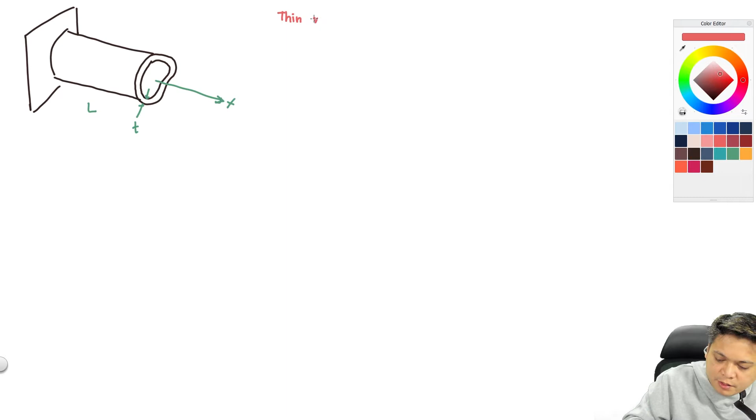Ngayon, ang mahalaga sa torsion for thin-walled, ang tawag natin dito is torsion for thin-walled vessel. Yung thickness niya sobrang manipis. Ngayon, yung thickness niya, it runs through dun sa pinaka-median, parang gitnang-gitna ng thickness. So may mapoform ka doon, isang closed loop.

At saka try natin paikutin by a torsion T. Ngayon, yung effect ng torsion na yon dun sa body, mula dito sa free end hanggang dun sa pinakadulo, nagbabago-bago. Kuha ko ng isa lang dito, maliit na block. Tapos i-draw ko siya dito, medyo papalakihin ko ng konti.

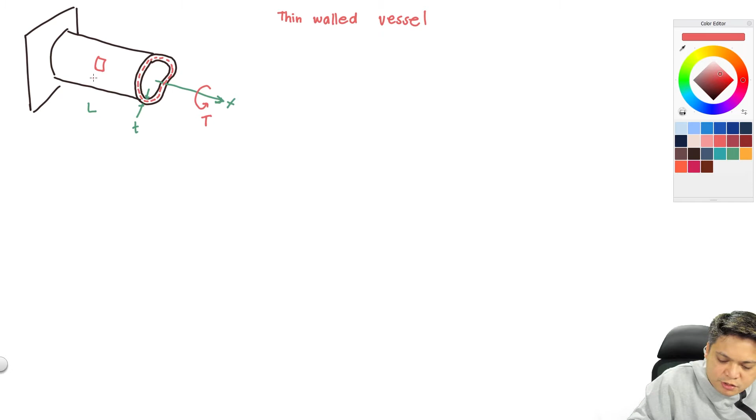So kapag dinrawing ko siya, para siyang medyo naka-curve na ganyan. Ayan, medyo curve na ganun. And then syempre meron yung thickness. Kumbaga nag-cut ako dun sa part na yan. So since dun sa kinat ko, 4 na edges yung nakatanaw.

So dito mayroon ako ditong shear force or shear stress. Dito meron din, hypothetical direction, meron ka din itong shear. Ngayon dun din sa magkabila, meron ka rin dong shear. So may shear ka rin na paganto, and may shear ka rin na paganan. Dapat baliktaran. If this is towards to the right, yung isa is towards to the left sa likod, para mag-equal sila, for equilibrium dapat equal sila.

Okay, itong dimension ko naito, this is parallel to the x. Kaya lang ang kinuha lang natin ay sobrang liit, infinitesimal length. So since that is the axis of x, I will call it as my dx. And itong pa-curve naito around the perimeter, kung titignan nyo ito lang yung part na yan. Kung ipo-project natin doon, ito lang yung part na yan. Tawagin natin siya, yung buong perimeter is S, so we will call it as ds.

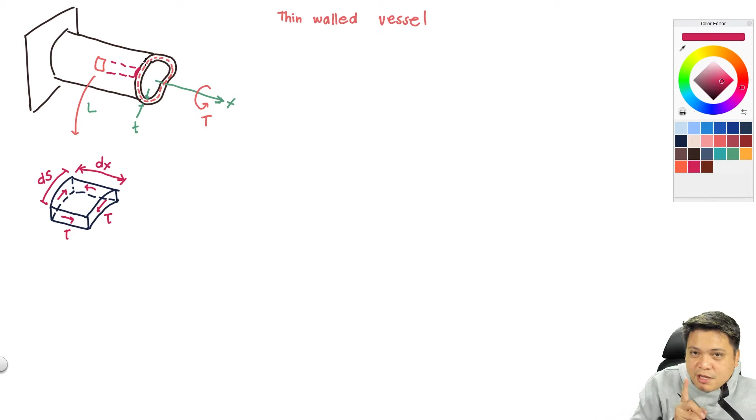So dalawang direction, you have the X, and then you have the S. Ngayon yung shear stress natin, since this time i-introduce ko na yung concept ng tinatawag nating shear flow. So you have there the shear flow. It runs through the midway or sa median line natin, I will call that as Q. Shear flow Q.

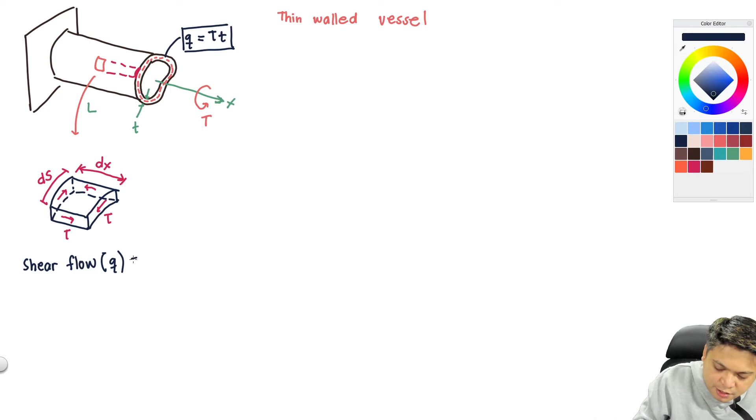Sir, saan yung shear flow? So yung shear flow, meron kang shear stress. Kasi para ma-multiply mo, para maging force yan, yung shearing stress mo i-multiply mo by the area. But this time imumultiply ko lang siya by the thickness. So ito na yung magiging formula for the shear flow: shear stress multiplied by the thickness. That's the first principle.

And now itatry natin ano. From this one, tawagin ko siyang yung shear flow natin na to, I will call it as Q. Ngayon itong nadagdag natin, yung shear natin sa magkabila, pag inano natin yan, aside from the Q, syempre may madadagdag kang shearing stress. So iyon is what you call the change in the shear flow with respect to the two axes. Unahin ko muna yung with respect to this axis sa dx. So I will call that as Q plus the partial derivative of shear flow with respect to x, and yung length niya towards what you call the dx.

Ito naman, kasi parang ang shear flow niya is in two direction, so you have here and then here also. So ganun din, you have here the Q, but this time this is the partial derivative of Q or the shear flow with respect to S.

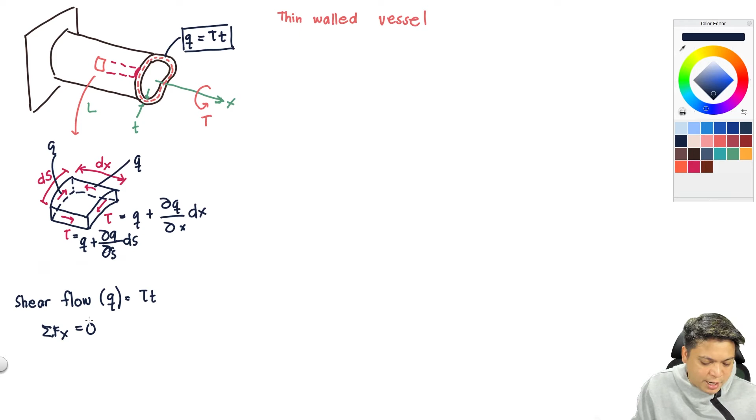So, for this force, this part here, that is equal to Q plus the partial derivative of Q with respect to S, times ds. And then I will have here minus Q, and then multiply it by dx. So you can have it that way.

This is not shearing stress, right? What is this now? Let's multiply it by dx. Because this is just shear flow. So, here it is. And then it should be multiplied also by dx.

Again, shear flow, but its length is the dx. Because shearing stress multiplied by the thickness gives the shear flow, and then multiply by length to get force. So this becomes force, then minus the one going back.

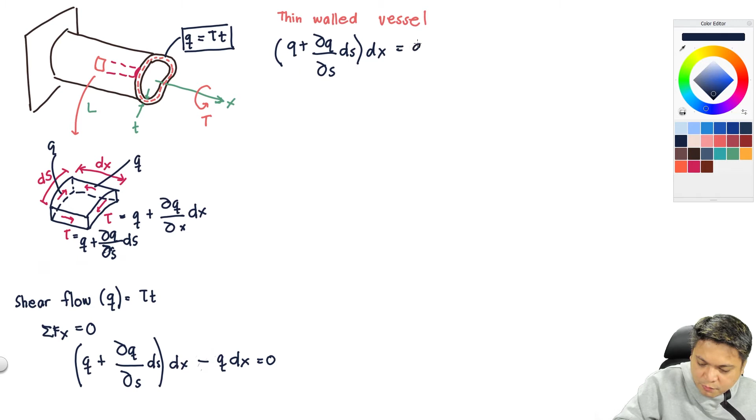So, minus Q, and you can have it as dx equal to 0. Let's see. So we can have it as Q plus the partial derivative of Q with respect to S, ds, dx. Moving it to the other side, that becomes Q times dx. So, dx cancels.

What does this mean? The additional shear flow, for a circular, closed loop, thin-walled vessel, is constant. This means there is no additional shearing stress added when we make a section. So this becomes 0.

This means our Q would be constant all throughout the thickness and all throughout our line, along our length. So this is with respect to the perimeter.

So let's check, let's do a summation of forces along S. Same thing here. So I will have this Q plus the partial derivative of Q with respect to X, dx, but multiplied by the distance, that is your ds, equals Q multiplied by ds. Same procedure, simplification, this dx is also equal to 0.

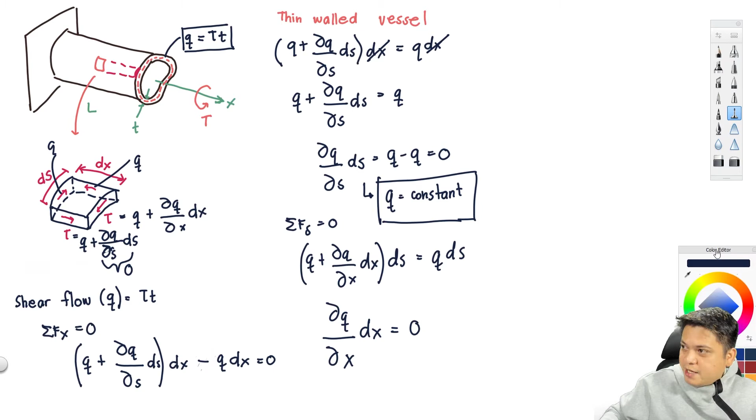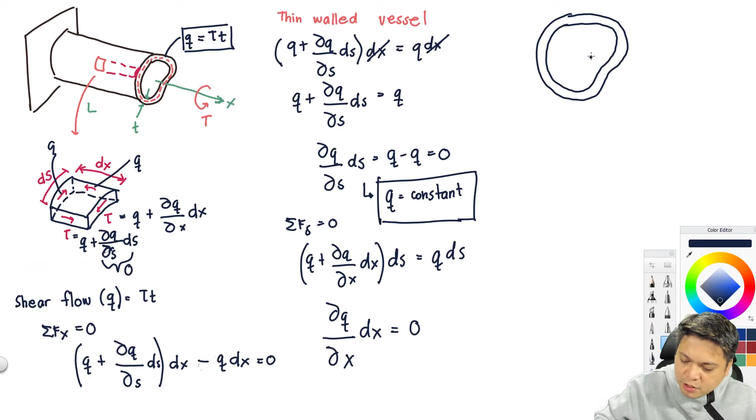Let me go back and draw this. Assuming our cross-section is here, I will call that the point or the center. Then, again, we have here the median line.

I'll just take an infinitesimal length of the perimeter. So, for example, from here to there, that's infinitesimal. So that dimension, I will call that my ds. And then, of course, you have a shear flow there.

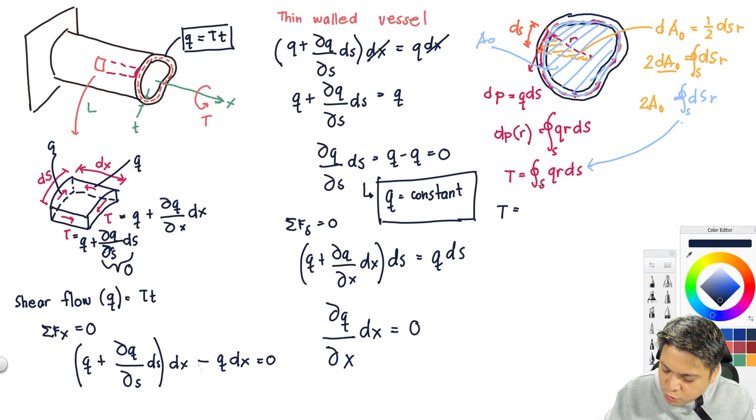Now, your 2A sub O, again, that would become equal to this time - ds r integral of s. I will substitute that in. So my torsion would now become equal to this integral of s, r, ds. That is 2A sub O.

So that I can now have q multiplied by 2A sub O. Now, what was our shear flow formula? Solving for q, that would become T over 2A sub O. So now you will now have this formula for the shearing stress - shear flow, sorry, for the shear flow.

So you have there the torsion, T, on the body, or the given - that's often the given. And then again, A sub O, this is the area enclosed by the median line. So that's the center.

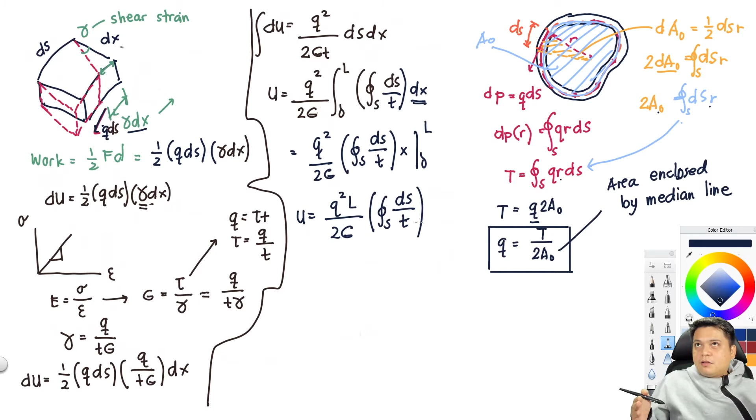Okay, palitan ko yon. So ang u natin, palitan ko yung x ng L. So you can have it as q squared multiplied by L all over 2G, and then integral of ds all over t. Okay, so ito na yung ating form dito, work done by the internal torque, or internal force.

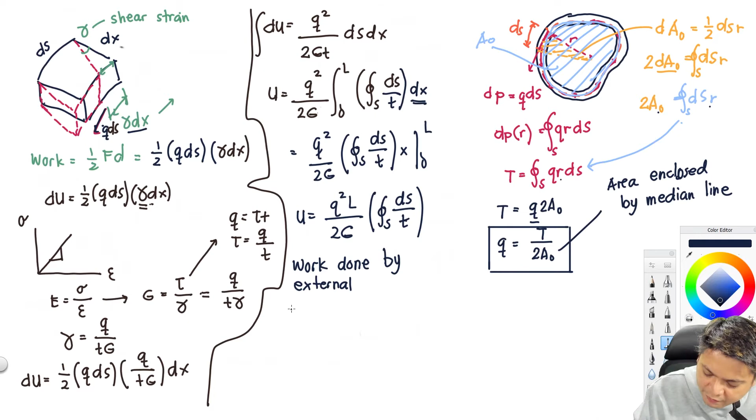Ngayon naman, we will be having the work done by external. Now, again, you can have it as u equals to 1/2 force times the distance. So yung force natin, that is actually the torque itself. Yung distance niya, syempre, yung dami ng nag-rotate. So we can have it as theta. We will call it as the theta. Yun yung hinahanap natin eh, yung rotation.

Ayan, meron na pala ako dito, so pwede ko na silang ipag-equate. Kasi sabi natin, the work done by internal should be equal to the work done of the external. So I can have it as q squared L all over 2G and then integral of s ds all over t. This is the internal, and then the external, that would be 1/2 t multiplied by the theta. Okay, sige, i-delete ko muna to.

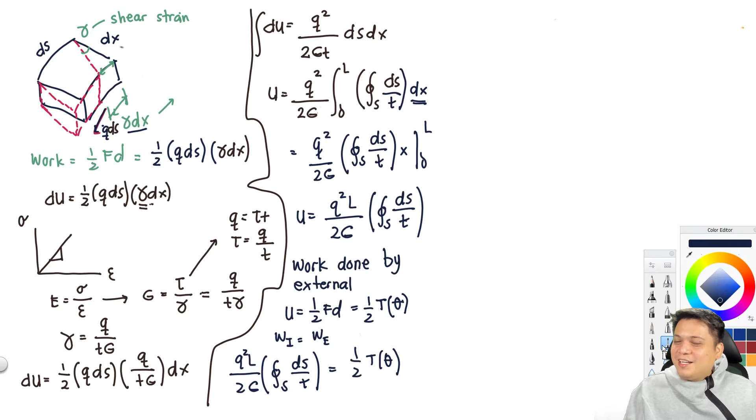O, di ba nakikita nyo kung saan ginagamit yung mga DE nyo? May nagtatanong sa akin, hirap-hirap daw ng DE, hindi naman ginagamit sa tunay na buhay. So again, in deriving those formula na meron tayo, dun galing. Dun yung proseso, no? Okay, so let's continue.

So, kunin ko na si Theta. I will be having here yung Theta natin. So you can have it as... Q squared L all over... ay, nasa na A sub O?

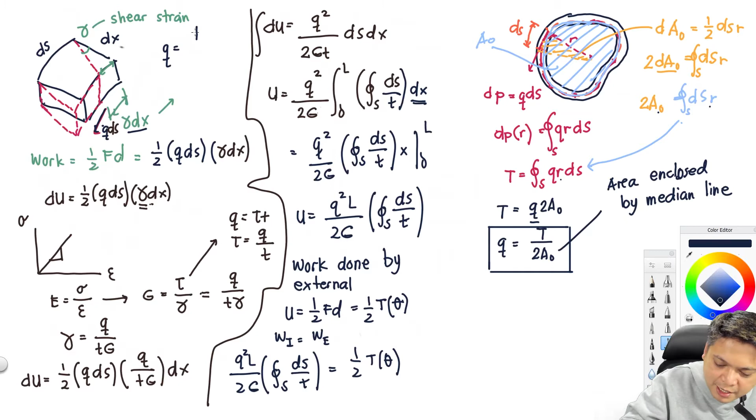Ayun, okay, we need to plug in the Q. Na-compute na natin kanina yon, yung may A sub O. Ay, na-delete ko yata, teka isa pa. Yun, okay, kaya pala hinahanap ko, hindi ko makita. So dito ko muna lagay ang T all over 2A sub O. Saka natin delete. Okay, I'm going to plug that in dun sa ating Q.

So pag pinlag-in ko yon, Q squared, so that is T all over 2A sub O squared, no? And then yung natira, L all over 2G, and then integral S ds all over T, is equals to 1/2, and then you multiply it by T and then by theta. Okay, we need to find for the theta.

Okay, so kunin natin si theta. So I can have it ito, pwede ko nang gawin yan na T squared all over 4AO squared, and then L all over 2G integral of S ds all over T. Ngayon, i-multiply ko to by 2, ilipat ko dun yung 2.

Okay, at ibaba ko yung T dito, ibaba ko yung T doon, para maging theta na lang siya. By the algebra, cancel ito, and then cancel yung 2. So we can have as T, L, all over 4G, A sub O squared, integral of S, ds all over T. So ito yung ating rotations.

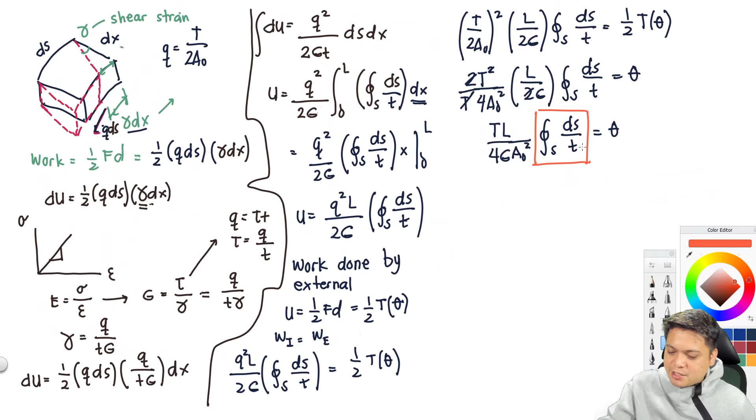Okay, kaya lang, how about this one? This term, okay? So again, para lang naman yan, changes. Parang sinasabi niyan is the change of the perimeter kapag lumiliit or lumalaki yung thickness. Pero kung constant naman yung thickness mo all throughout the line of the S, this one would become equal to S. Again, you should have the constant T. So that would become T, L, and then that would become S all over 4G A sub O squared, and that would be the rotation that we are looking for.

Okay, so this now becomes the formula for the rotations. So dalawa lang naman yung kakabisuhin natin, that would be the flow, and then we have here the rotation. Okay po, sige, find time to copy.

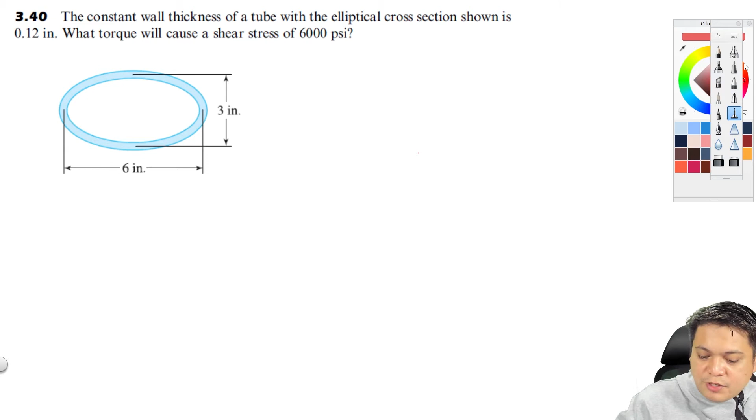Okay, so again, this is the shear flow we're talking about. The cross-section area is constant, so we don't need to integrate. So this is our shear flow, Q.

The formula for that is T over 2A sub O, from the formula of torque, which we derived earlier. So we can get the shear flow, and then we can get the shear stress.

The shear stress, to get it, is the shear flow divided by our thickness. Since our thickness is constant, we don't need to integrate. So we just substitute our shear max value. So our Q, this term, we substitute there.

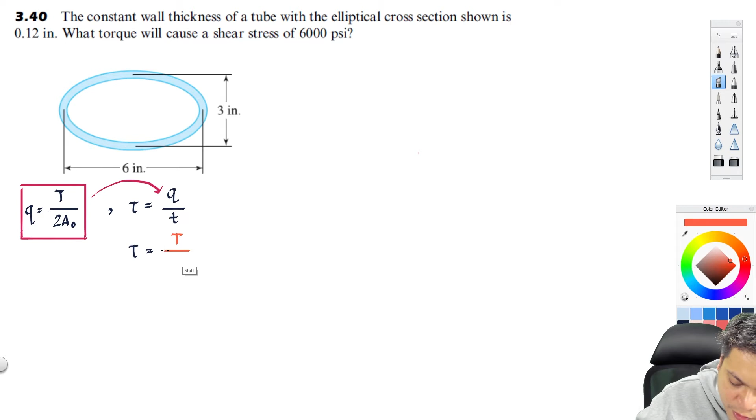So we can have it as shear equals Q, which becomes equal to T over 2A sub O. And I still have the T there. So this would be our formula.

So our maximum shear is 6,000, and again the unit is in PSI. Now what we're solving for is the value of T. So we have T over 2A sub O.

So our A sub O is the area of the median. If we look at our median, there it is, in the middle.

Since this is an ellipse, the formula for A sub O is pi AB. This is the area of an ellipse.

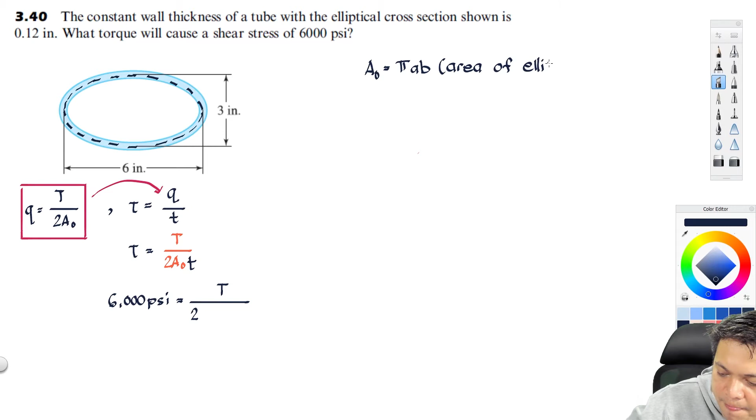So where is that? From the center, this is our center. This would be one value, just half of it. So we can say A equals 3 inches, and B equals 1.5 inches. So this is your A, and this is your B.

So our A sub O becomes pi multiplied by 3 and then multiplied by 1.5. I put that there as A sub O, that is pi times 3 times 1.5, and of course the thickness is 0.12.

So to solve for the value of T, that becomes equal to 6,000 multiplied by 2, pi, 3, 1.5, and 0.12. So you have the resulting torque, that's 6,000 times 2 times pi times 3 times 1.5 times 0.12.

So you can have it as 20,357.52. Again the unit for our torque, since PSI is pound and inches, you can have it as pound-inch. So this is now your answer for the question, the required torque to have a shear stress of 6,000 PSI. Okay, let's try to copy first.

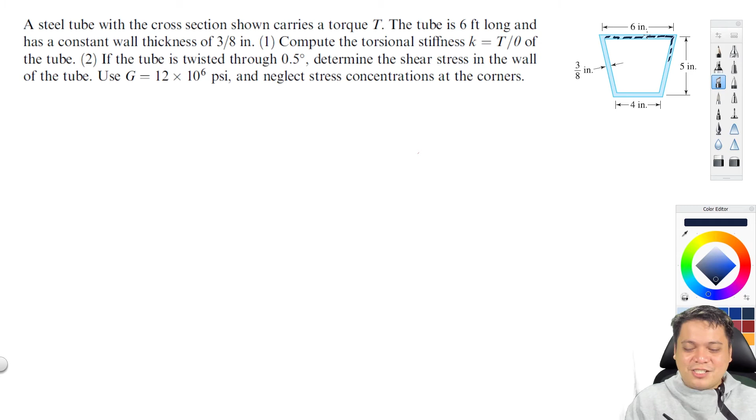Perhaps once you graduate, when you take your master's degree. Okay, let's proceed.

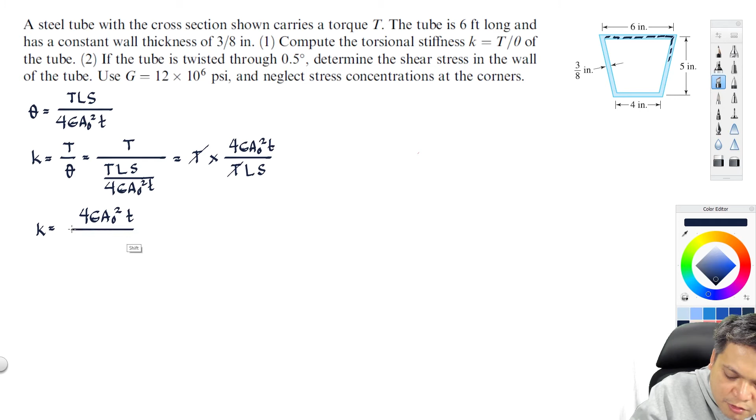But before we get that, let's first find A sub O. Again, this is the median. Let's draw the median.

To solve for A sub O, the area of a trapezoid is 1/2 times (base 1 plus base 2) multiplied by the height. Base 1 is 4, base 2 is 6, and the height is 5. So A sub O equals 1/2 times (4 plus 6) multiplied by 5, which gives us 25 inches squared.

How about the perimeter or S? We have 6 and then 4, then two of this side. So I'll just multiply that by 2. But that 2, since you have a 5 there, acts like the hypotenuse of a triangle.

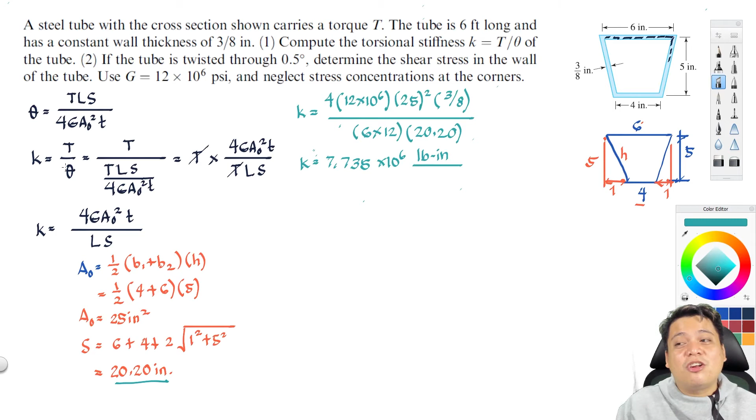Remember, if you are going to use theta in multiplication or division, and it's not inside a trigonometric function like sine, cosine, tangent, your theta should always be in radian. But when it's inside sine, cosine, tangent, it's okay for it to be in angle form. So in our formula, since theta is outside the trigonometric function, the unit for that should be in radian.

So you can have this answer, or if you want to convert it, what's our conversion? In 2 pi, you have 360 degrees. Or in 1 pi, you have 180. So that's your K, multiply that by pi over 180, and you can have it as 135.00 times 10 to the 3, in pound inch per degree this time. So either of the two is fine, unless the unit specifically asked for is pound inch per degree. So that is already the solution for that.

Let's go to number 2. What is number 2? Determine if the tube is twisted through 0.5 degrees, determine the shear stress in the wall of the tube.

Now, to get T from this formula, we already have K, and the angle is given, so we can solve for T. Our T is K multiplied by theta. The K I'll use, since it's already in degrees, is this one: 135 times 10 to the 3 pound inch per degree. Multiply it by theta, which is 0.5 degrees. The degree units cancel, so the unit of torque is now in pound inch.

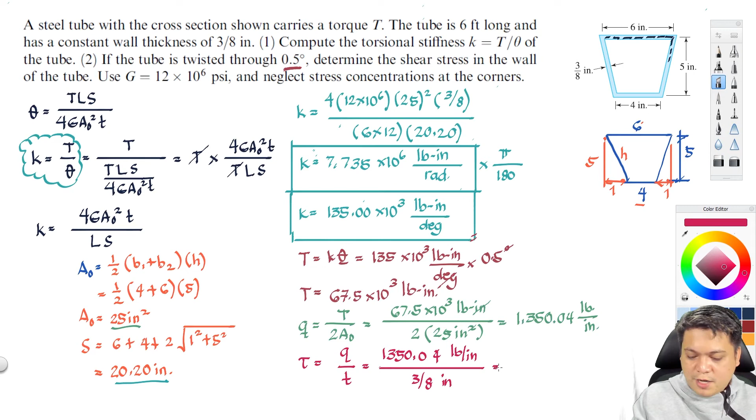So divided by 3 over 8, you can have it as 3,600.10, again in PSI. So this is now the answer for the second problem. What's important here is understanding the concept of K, which is T over theta, and the rest follows the formulas we applied earlier.

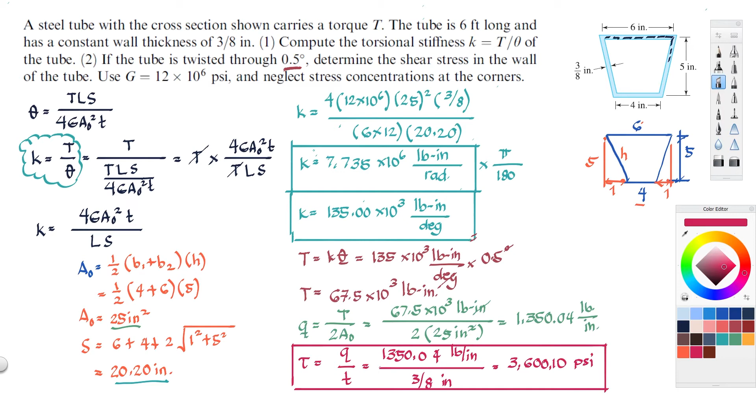Let's have the next problem. An aluminum tube, 1.2 meters long, has the semicircular cross-section shown in the figure. If the stress concentrations at the corners are neglected, determine 1: the torque that causes the maximum shear stress of 40 megapascal, and 2: the corresponding angle of twist of the tube. Use G equals 28 gigapascal for aluminum.

This time, the thickness of our tube is not constant. There's 2 mm, then at the bottom, there's 3 mm. However, the median line is semicircular, with a radius of 25 mm.

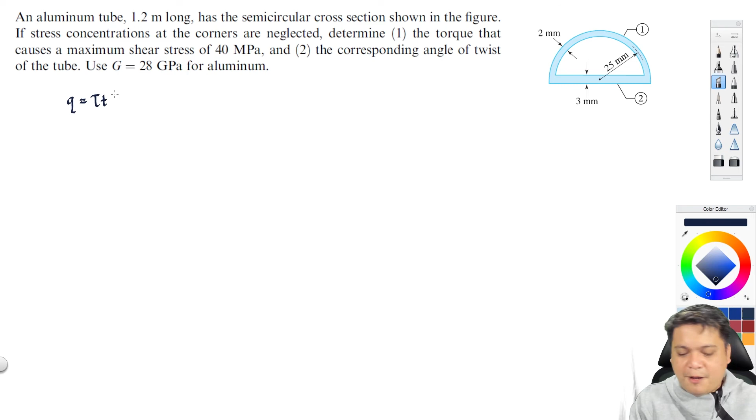So again, to solve for Q, what is our formula for Q? We have Q equals shear stress multiplied by the thickness. The shear stress is 40 megapascal.

Okay, ano ang gagamitin mong shear, anong gagamitin mong thickness? Kung papansin natin yung formula, mentras mas maliit yung thickness mo, mas lumalaki yung shear stress mo. They are indirectly proportional. So it means mas malaking thickness, mas maliit na shear stress, mas maliit na thickness, mas malaking shear stress.

So to produce the maximum shear stress of 40 between the two of 2mm and 3mm, yung 2mm yung gagamitin natin. So we will use the 2mm.

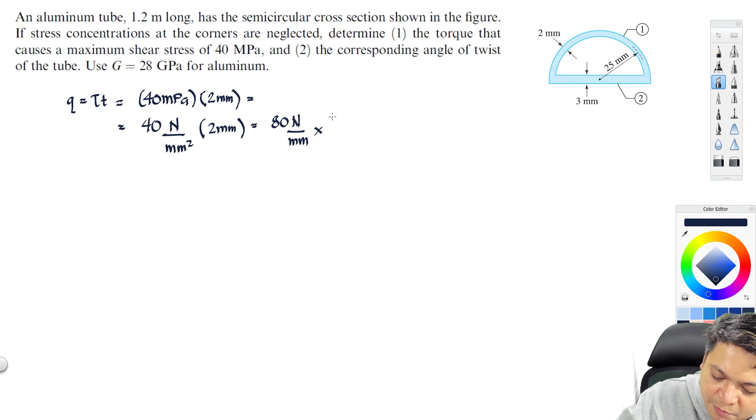So this one is 40, 40 megapascal times 2mm. Ang unit natin dito is Newton per millimeter squared, times 2mm, and that would become 80 Newton per millimeter. Kung gusto nyo gawing Newton per meter, multiply natin, 1,000 mm in 1 meter, cancel yung mm, so you can have it as 80 times 10 to the 3, this is now Newton per meter.

Now for the A sub O, bagay yung kulay, para lang siyang semicircle. So area of the semicircle is 1/2 pi r squared, kalahati ng area ng circle. So 1/2 pi, ang r natin is 25mm, squared. So 0.5 of pi multiplied by 25 squared, equals 981.75 mm squared.

Now to solve for the T, kasi ang hinahanap natin is the torque that could create the maximum shear stress of 40 megapascal. So from the formula, T is equals to 2 A sub O multiplied by Q. Ang A sub O natin is naka-mm, 981.75 mm squared, so dapat ang shear flow natin naka-mm din, 80 Newton per mm. Cancel yung mm, so ang resulting unit is Newton millimeter. So you can have it as 2 times 981.75 times 80.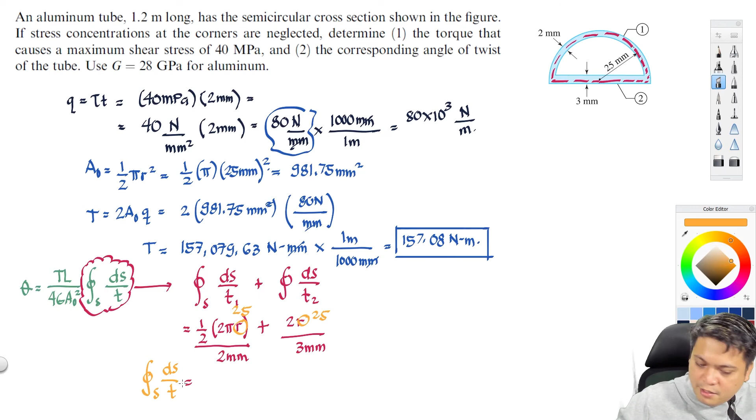So that would become equal to 1/2, palitan ko na to, palitan ko na yung R natin ng 25, and this one palitan ko na rin ng 25. Ito na yung integral of S ds all over t. So you can have it as 0.5, 2 pi r all over 2, plus 2 times 25 all over 3. You can have that equal to 55.94, again the unit would be in mm.

Isa-substitute natin ngayon dun, to get for the theta, the whole theta. We can have it equal to the T, ang T natin, that is in Newton meter to, ang gawin natin, lahat gagawin natin in millimeter, para maging consistent tayo. So etong gamitin natin para millimeter na tayo, 157,079.63, in Newton millimeter. And ang L natin is ilan, 1.2 meters, so gawin natin 1,200 mm, all over 4. And G natin, para maging Newton millimeter, gawin natin megapascal, 28,000, and then A sub O squared.

981.75. Okay? And then, syempre, i-multiply natin. Multiply natin to. So, lagay ko doon. Oops, delete ko to. Okay, multiply by 55.94. Okay? So, you can have it. The angle, again, that would be in radian. So, check.

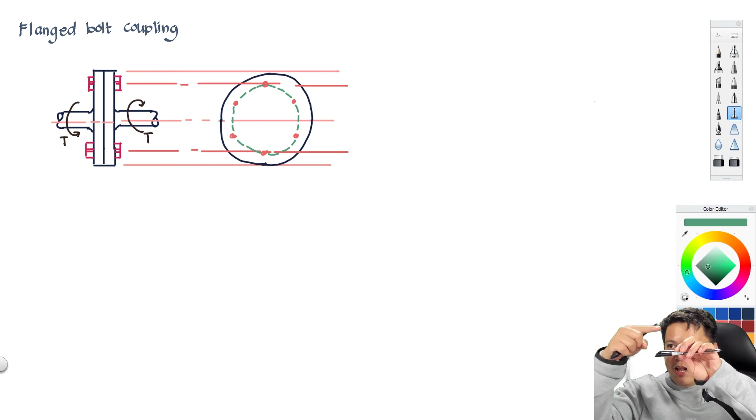The next topic will be the flange bolt coupling. So, para rin siyang torsion, ano. Imagine din nyo na lang, you have here the two pens na pinagdikit. Okay, para mapagdikit yun, nilalagay nyo ng plate. Okay, tapos, nilalagay nyo ng bolt sa gilid. Okay, parang itong nakikita nyo. Okay, so meron tayong plate, tapos may nagko-connect sila ng mga bolts.

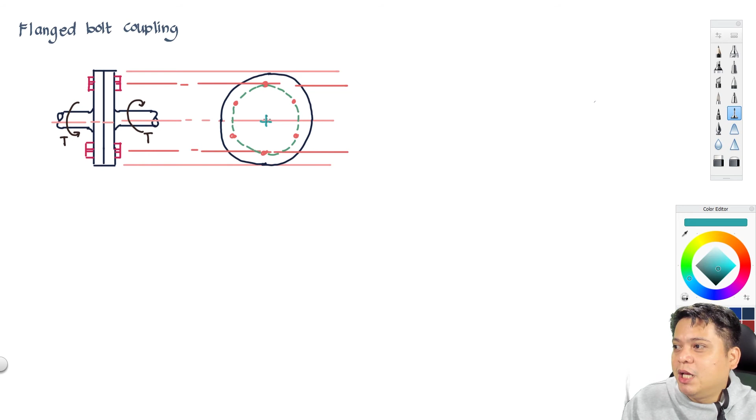Okay, now, yung torque na yun, okay, pagtutulong-tulungan yun, paghahati-hatian nyo ng lahat ng bolts. Okay? So, with this, kailangan alam nyo kung nasan yung pinaka-centroid ng bolt. Okay? So, alamin natin nasan yung center ng bolt. Okay? And then, kada isa from the center of bolt, okay, kukuha yun ng perpendicular distance, parang tangent doon sa kung saan man siya. So, yung point of tangents na yun, magkakaroon doon ng force. Magkakaroon yun ng force doon, and you will have as P. Okay? Again, ang nagre-resist doon is yung shearing stress ng bolt. Okay? And then you multiplied it by the area of the bolt, of course. No? So, or since ang bolt is circular, so you can have it as shear multiplied it by pi over 4 multiplied by d squared. Okay? So, para sa isa yon.

Ngayon, para dito, ganun din. Kuha ka dito, tangent C. And then, yung pinaka-tangent doon, which is 90 degree yun, again, that would be another P. Okay? And then, meron yung R. Okay, R1. And then, meron tong R2. And then, meron yung R3. Okay? So, kung ilan man yon, so yung pinaka-torque natin, okay, that would become equal to P N, okay, R N, okay, so that would be the summation. Okay, so parang ito lang naman yung sinasabi doon. So you have there the summation of the force P and then the R or the radius mula doon sa pinaka-center. Okay, so I'll give one example for this one, pinaka-basic example lang muna.

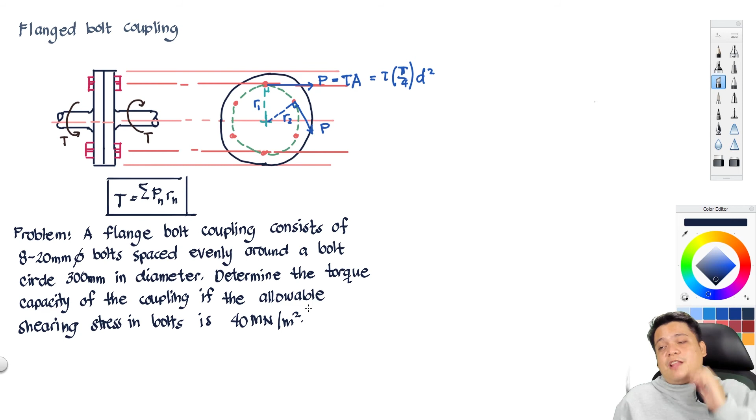Okay. So, a flange bolt coupling consists of 8, 20 mm. Okay, so parang yung pinaka-drawing pala natin, ano? 1, 2, 3, 4, 5, sorry. Siya pala is 8. Okay. So, sige, gawa tayo. So, parang meron ka daw dito. Let's say, you will be having here. Okay. Tapos, meron kang 8. 1, 2, 3, 4, 5, 5, 6, 7, 8. Okay.

So, ayun. Meron ka daw 8, 20 mm diameter bolts. Okay? And, nandun daw siya, okay? They are spaced evenly around a bolt circle. Okay? So, in short, from the center, okay? Yun. Ang kanya daw radius mula dito hanggang doon is around ilan? 300 yung diameter, so this would be 150 mm. Okay, ito yung tinutukoy niyang diameter doon. So mula dito hanggang doon, yun. So that is the 300 mm diameter.

Okay? Now, the allowable shearing stress is 40. Again, ito ay Newton per meter square plus mega. Okay, so ibig sabihin, itong part na to is in Pascal and then you have the mega. So in short, that is just equals to 40 mega Pascal. Okay? Kapag same lang yung distance, okay, pare-parehas lang naman silang 150 from the center, ano? So, iisa lang yung, kumbaga, capacity ng kada isa. So, yung P natin, that would be allowable multiplied it by the area.

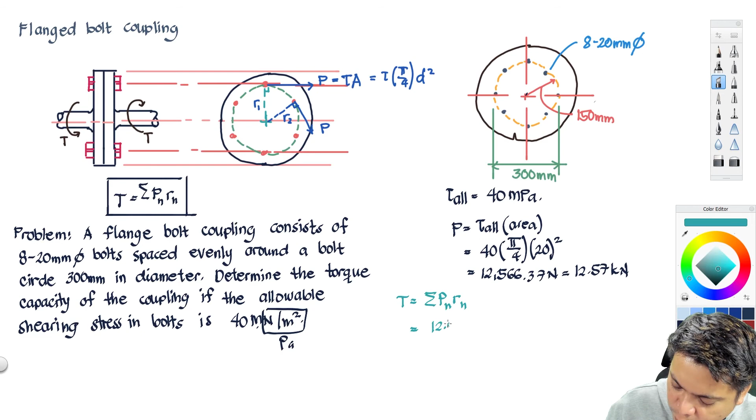So, yung P natin, that is 12.57. And yung R natin is para maging meter, para kilonewton meter tayo, so 0.15 meter. Summation siya, since pare-pareho naman silang ganito yung formula, 1 to 8, i-multiply natin by 8. So the torque equals 12.57 times 0.15 times 8, giving us 15.084 kilonewton meter. So that is the very basic.

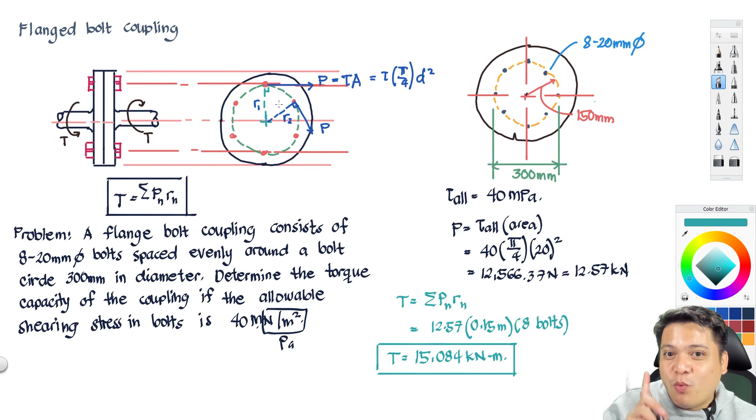So nanggaling lang siya sa concept ng shearing stress. Kaya lang yung shearing stress natin, pag multiply by area, that would be a shearing force, and that shearing force would act perpendicular doon sa ating bolt center. So that is 1 torque. Eh, 8 sila, so we multiply it by 8. Sige po, copy muna for a while.

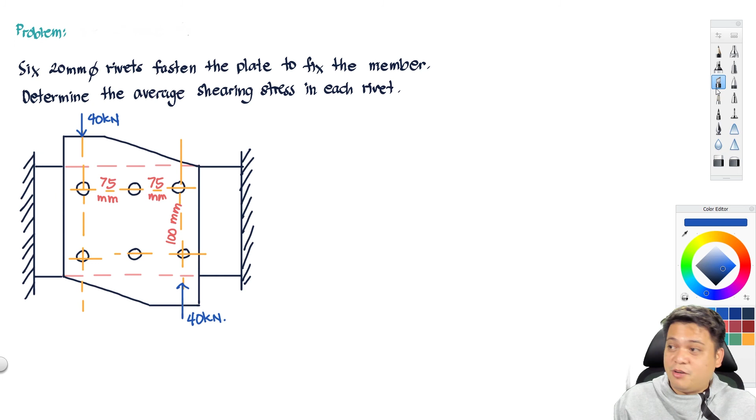For this kind of problem, sabi nga natin, from the center, dapat alam natin kung nasaan yung center ng bolts. For this one, we all know na nandito yung ating center. Kapag hindi, you will use the Varignon's theorem in your statics to find for the center of the area. Now from here, magtutulong-tulungan lahat ng bolts. Pero since hindi na siya circular, mahihirapan na tayo.

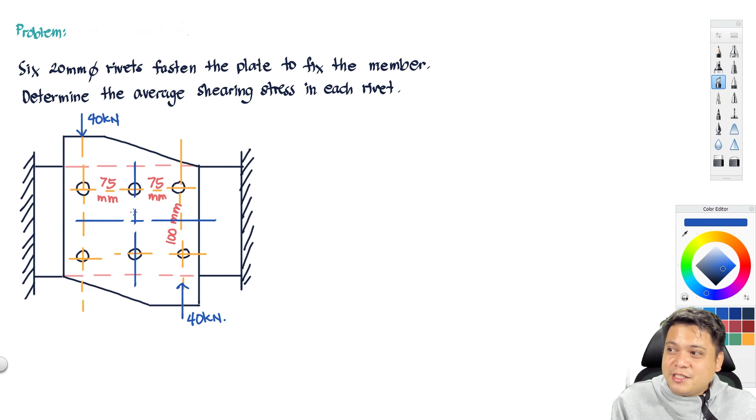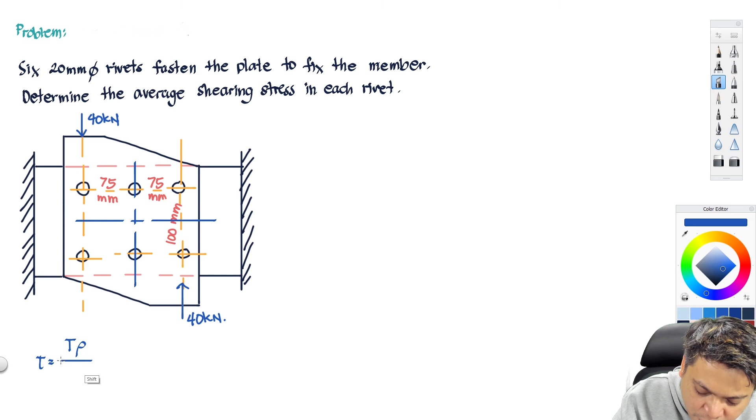Pwede natin gamitin yung principle ng shearing stress natin na T rho over J. Remember, we have here the shearing stress, and we can have it as T rho all over the J. For this one, yung J natin, sabi natin that is the second moment of area, so ibig sabihin yung J natin, that would be summation of the area multiplied by the rho squared.

Unahin natin, ito kasing apat. Lagyan ko ng pangalan: bolt 1, bolt 2, or rivet 3, and 4, they are radially equal. Ibig sabihin yung distance nila doon mula sa center equal naman: 75, then 50, 75, 75. If you imagine, ibig sabihin yung apat na bolts ko may isa lang radius. So that I will have the J equal to apat na bolts, ang area niya is pi over 4 multiplied by 20 squared.

And then, ang radial distance niya mula dito is square root of 75 squared plus 50 squared. Again, this is the second moment of area, so you can have it this squared, so you cancel out this one.

Plus, aside from that, itong dalawang bolts ko, which is bolt 5 and bolt 6, again they are equal. Ano yung radius nila, ano yung distance nila mula dito hanggang doon? That is equal to 50. So you can have it as 2 multiplied by pi over 4, 20 squared. Again, ang distance niya, ang rho niya is 50 squared. So mula dito, rho squared, you can have the value of J.

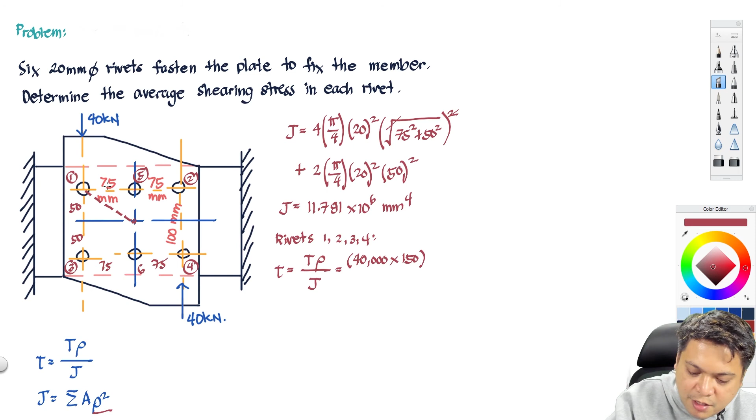What about the T? Yung T is the moment created by the force. So this is a couple, 40 kilonewton. Gawin ko siyang, para maging mm, 40,000. And then its moment arm is 150, which is 75 plus 75. Again, the rho would be square root of 75 squared plus 50 squared, all over the J, which is 11.781 times 10 to the 6.

So you have here the stress for rivets 1, 2, 3, and 4: times 150, the square root of 75 squared plus 50 squared, over J, so you can have it as 45.91 mega Pascal. So you have here for the rivets 1, 2, 3, and 4.

How about for the rivets 5 and 6? Again, you can have the shear stress: T rho all over the J. So again, ang T natin is 40,000 times 150. How about the rho? Mula dito hanggang doon sa bolt, that is just 50, all over the J, which is 11.781 times 10 to the 6. So you can have it, the shearing stress, 40 times 10 to the 3 times 150 times 50 over the J.

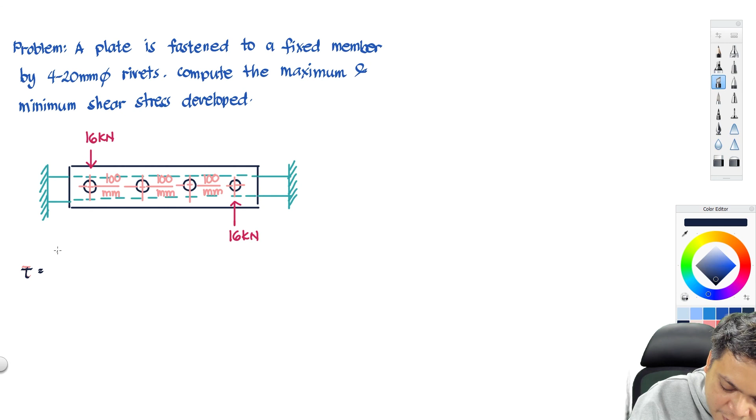So what we will do is to get for the shear stress, we will be having here T rho all over J. Okay, so unahin muna natin kung paano kinocompute si J. So sabi natin that would be the summation of area and then rho squared. Okay, so iname natin. So we have here again the bolt 1, the bolt 2, the bolt 3, and then the bolt 4.

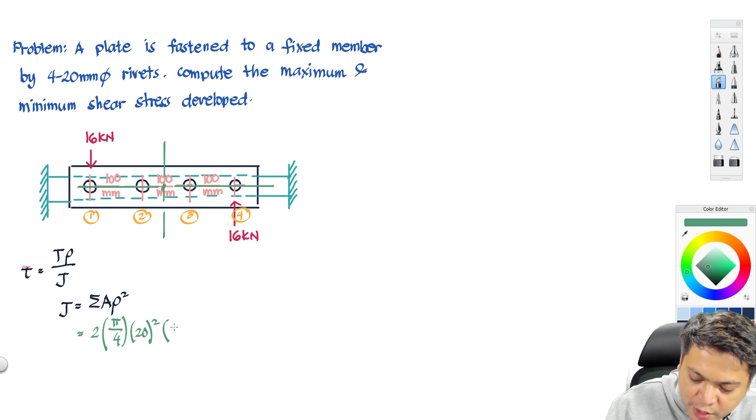Kung papansinin natin by symmetry, alam natin na nandito kagad yung pinaka-center ng bolt. Okay, ayan, nandyan yung pinaka-center. So, mula dito sa pinaka-point na to, which is the center, yung bolt 1 and bolt 4, same lang ang distance. Okay, so pwede kong sabihin na dalawa yung area na yun. So again, that is 20, so pi over 4 multiplied by 20 squared. Okay, at ang distance niya mula dito sa center, papunta dun sa bolt, is 150. Okay, so ayun, mula dun hanggang dito, you can have it as 150. Ayun din, mula dun, that is 150. While the others, 50 lang.

Okay, so squared, plus again dalawa ulit na bolt, so for the bolt, ito ay for bolt 1 and 4. So you will be having here 2 multiplied by pi all over 4 multiplied by 20 squared, again you can have it as 50 squared, so again this one is for bolt 2 and bolt 3. Okay, so we will be having here J is equal to 2 times pi all over 4 times 20 squared multiplied by 150 squared, plus 2 times pi all over 4 times 20 squared multiplied by 50 squared. Okay, so again you will be having here 15.71 times 10 to the 6 mm to the 4.

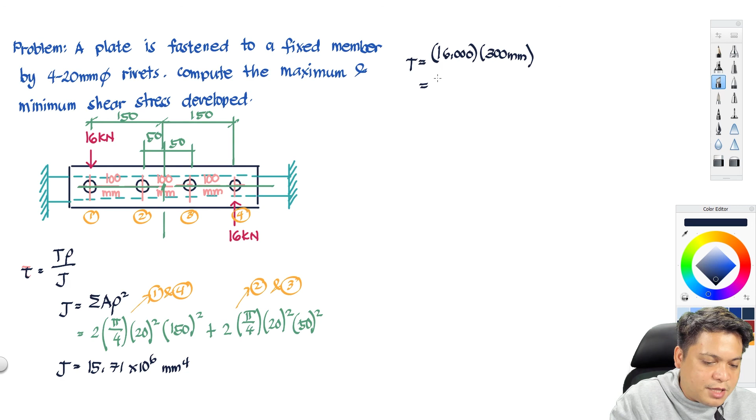So ilagay ko siya sa calcu ko para sakto yung aking sagot. Okay, how about the T? So ang T natin is 16 kilonewton, so that is 16,000. And then i-multiply natin by the distance, okay, so that's 300 since this is a couple. Okay, so you can have it as 16,000 times 300. So that is 4,800 times 10 to the 3. Again, this is in Newton millimeter.

Okay, so now since equal yung distance ng rivets 1 and 4, and sila yung pinakamalayo, so we expect this to experience maximum shear. Okay, so ang shear max natin is T, 4,800 times 10 to the 3, and then ang rho, ang distance from this center papunta dun sa bolt is 150, all over the J, which is 15.71 times 10 to the 6. So you will be having here the maximum shear stress, 4,800 times 10 to the 3 multiplied by 150 all over J. So you will be having the maximum of 45.84 megapascal.

Okay, so yung bolt na pinakamalapit sa kanya, siya naman ang makaka-experience ng minimum, and that's the bolt or rivet 2 and rivet 3. So again, it should be on the minimum shear. Okay, so minimum is equals to rho T, 4,800 times 10 to the 3, and then we have the rho, which is 50, all over the J, which is 15.71 times 10 to the 6. So you will get the minimum shear to be, okay so that's 50, okay so that's around 15.28, again this is in megapascal.